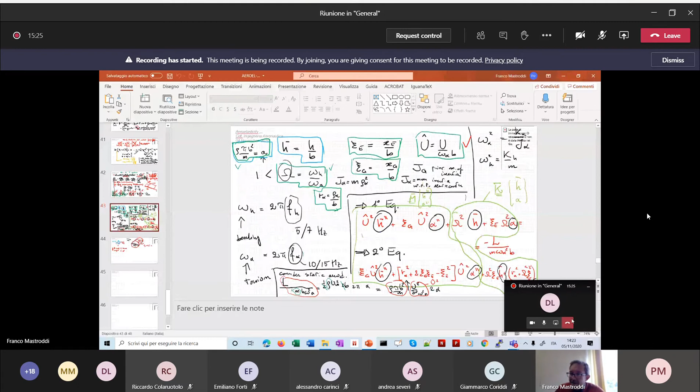Okay, I am very sorry, but I am going crazy in this period with this COVID emergency, and here I am for my favorite job, which is teaching. Okay, so here we are. Can you hear me? Yes. Okay, thank you, guys.

So we have the following undimensional numbers. We have this number here representing the ratio between what happens in bending with respect to what happens in torsion, in the natural frequency sense. So this is not properly the ratio between the first and second natural frequency of the system, but the ratio between the first natural frequency when the structural dynamics is decoupled and the second one when the structural dynamics is uncoupled.

And here we have the mass ratio, and this mass ratio has an easy interpretation: the mass of the solid structure with respect to the mass of the fluid in these cylinders. Okay. And at the end, we have obtained these two equations of motion. The first undimensional equation of motion is this here, with this undimensional term, this, and this.

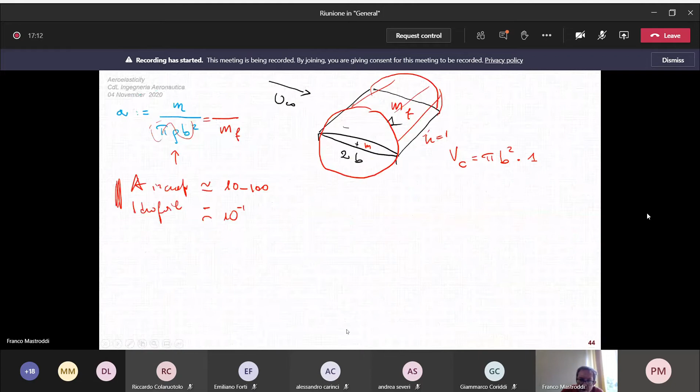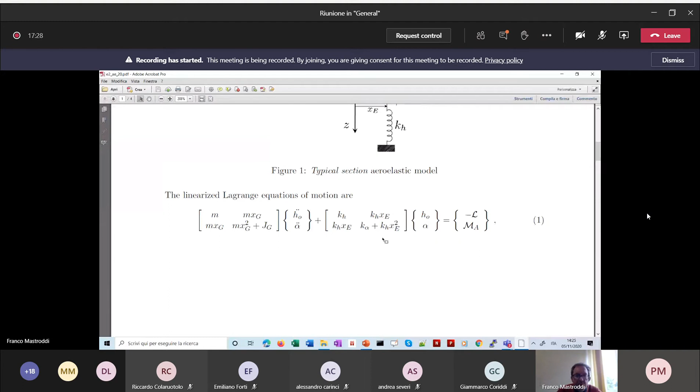And at the end of this undimensionalizing process, we have our final equations, which are these here. Can you see this? Yes. We started from the original dimensional system to this undimensional system, and we have our mass matrix, our stiffness matrix, and the load undimensionalized through these two groups. In the denominator we divided by a force per unit length, and here by a moment per unit length.

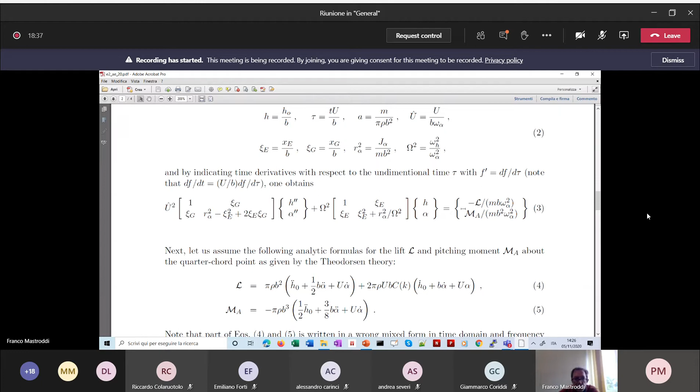In the left-hand side, if you do not consider the right-hand side term, you have the free response of your system, and you can study this free response by solving the natural frequency problem. So you should take the determinant of these two mass and stiffness matrices. In particular, we could do the following. Give me a second. We can take this equation. Okay, here.

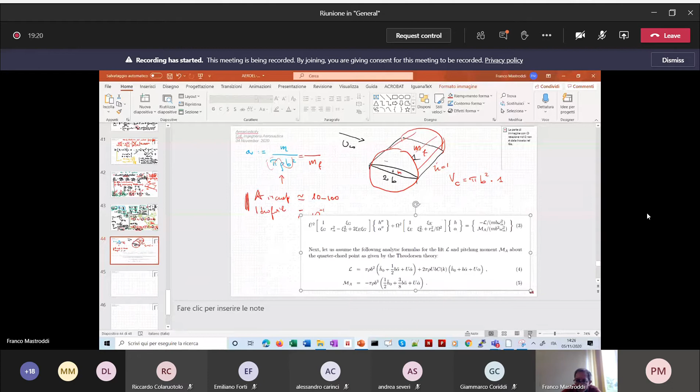And here we have this equation, and if you consider this part here, you have the undimensionalized mass matrix applied to the state variables, derived two times with respect to undimensional time, plus a stiffness matrix applied to h and alpha. And in the free response analysis, you don't have this forcing term, you have 0.

Therefore, if you perform on this system a modal analysis, in the sense that you consider the problem determinant of K minus omega squared M equal to 0, you obtain two omega values, omega 1 equal to a number and omega 2 equal to a number, which are in general different from omega h and omega alpha, but they are probably related.

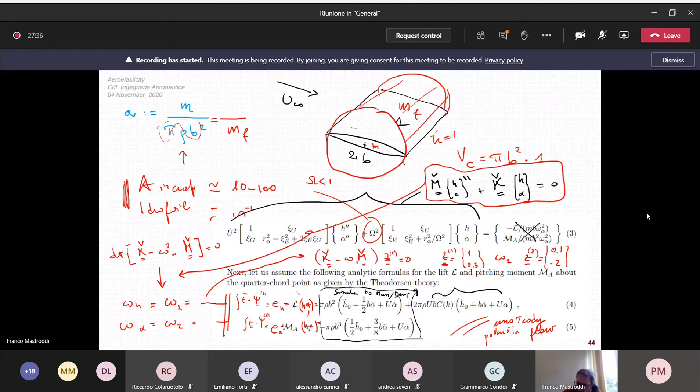And this is more complicated because we have, again, the pitch angle, the derivative of the pitch, the derivative of the plunge, but we have a very strange special function. The special function here is a famous function also known as Theodorsen function. This is a guy who lived in the thirties, okay?

Do you know the Glauert theory? Do you know this name, Glauert? Yes or no? Yes. Okay, so you know the Glauert theory, which is the two-dimensional theory for the airfoil, but steady case. So the Theodorsen function is just the extension of Glauert theory for the unsteady case.

Okay, and this is the formula for lift and moment within the Theodorsen theory, giving you time by time the lift and the moment as given by taking the derivative of this quantity. But we have also this quantity here. And if you take a book of aeroelasticity and look for this formula as Theodorsen lift function, you find this, but this is essentially wrong. This is wrong. Why is it wrong?

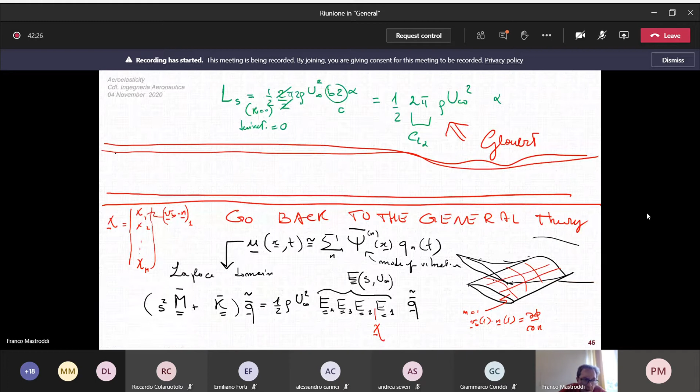Let me write here the note: already done. What have we already done? Linearized potential flow. And as a direct fruit of this linearization of the incompressible potential flow, we have defined an E2 matrix which is capable to transform the chi tilde vector, this unsteady boundary condition evaluated for each panel, and through the definition of potential flow we have the value of the potential in the same panel.

This is a vector. Whenever you apply E1 to the Q modal vector, you have chi. When you apply E2 on chi, you have the velocity potential vector. When you apply E3 on phi, what do you have? The E3 operator is another operator able to transform our potential flow into CP, the pressure coefficient vector. The pressure coefficient vector is similar to the chi vector, a vector defined on the body, giving the pressure coefficient value in panel 1, in panel 2, and so on.

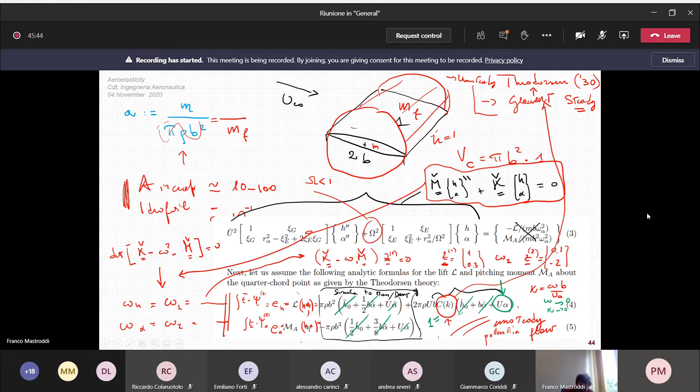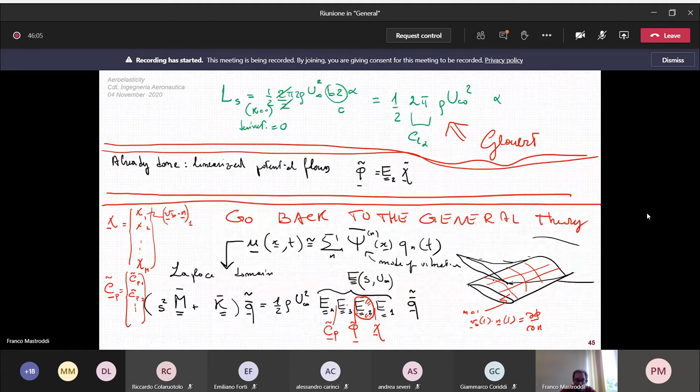Okay, so this is our next scope. In particular, within the framework of this general theory, I now want to focus on the matrix E3. So: evaluation of the matrix transfer function operator E3 as a function of S and as a function of U infinity. E3 by definition is the operator able to transform the velocity potential into the pressure coefficient vector in the Laplace domain.

So the theory behind this matrix representation is the Bernoulli equation, of course. In the Bernoulli equation, we found that the time derivative of phi plus 1/2 the square of the amplitude of the gradient of phi, which is the velocity, plus pressure over rho is a function of time only. It's not a function of space. This is the Bernoulli theorem. And in particular, you can evaluate this quantity in the undisturbed flow, so at infinity here.

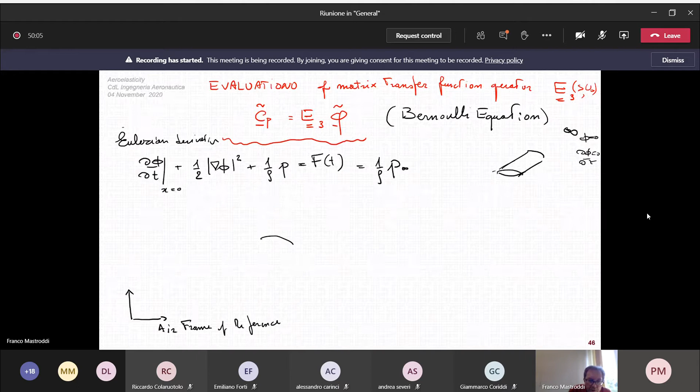And here you have your aircraft flying, and you have eventually a body frame of reference. This body frame of reference is actually sharing the x direction of the absolute air frame of reference, and this is typically z, and this is typically y in aeroelasticity, but this is a y in body frame of reference. This is an x in body frame of reference, and z.

And typically this flying reference system is moving with a constant velocity, which is equal to the aircraft velocity, of course. So here you have a velocity like this. This is flying. So how can I represent this air frame of reference derivative as a function of the body frame of reference derivative?

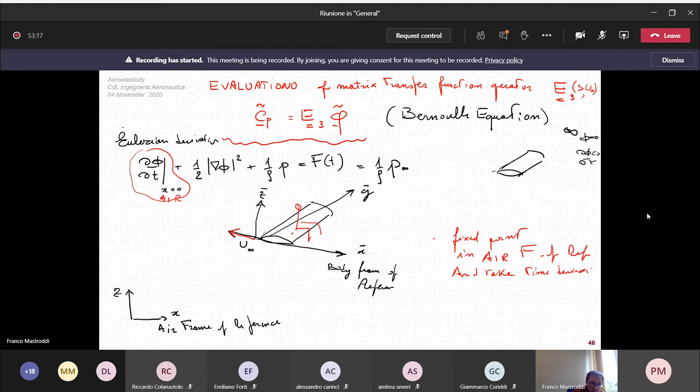And for example, here we are talking about the velocity potential. So fix this point and see what happens to the velocity potential as a function of time, keeping this point fixed. When you are here, this is me sitting on the aircraft, okay, and this is my new body frame of reference. When I take a time derivative in my body frame of reference, I consider a point in my body frame of reference, okay?

But now I am obliged to represent this physical concept. How can I describe this derivative in my frame of reference? Well, if you are like me here sitting on this wing, you see this point going in this direction, far and far, moving with respect to me with the velocity u infinite, right? So from my side, you see this point going farther and farther in time, and this point is moving with the velocity equal to u infinite.

So if you want to perform this derivative, you have to follow this point with respect to u. So this time derivative is, in my view, equal to the time derivative of phi with respect to time, but at x body frame of reference fixed, plus a convective term equal to the velocity of this point with respect to me, which is i vector u infinite dot the gradient of phi. Okay.

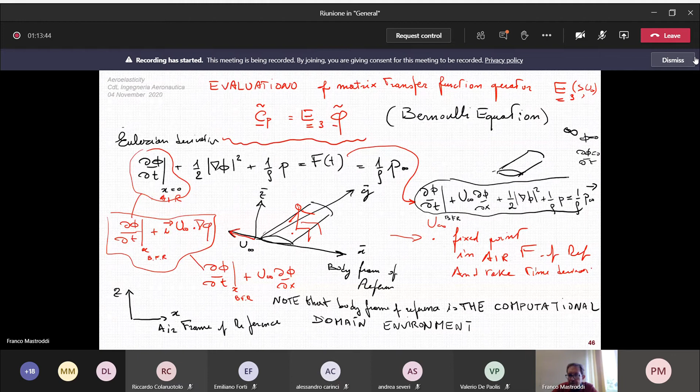So we can go ahead here and we can represent this like phi dot plus U infinite. This dot is a time derivative in body frame of reference, plus phi x. This phi x is representing d phi on dx, plus this term, gradient of phi, the amplitude to the power 2, plus pressure, and the pressure at infinite divided by rho. I don't know what happens.

Okay, divided by rho. Now, if we want to linearize our Bernoulli theorem in this condition, we have just to discard this term. So we are considering a linearization. And after this linearization, we can define our CP coefficient like the jump of the pressure minus P infinite divided by the dynamic pressure, a reference pressure, which is 1/2 rho U infinite to the power 2.

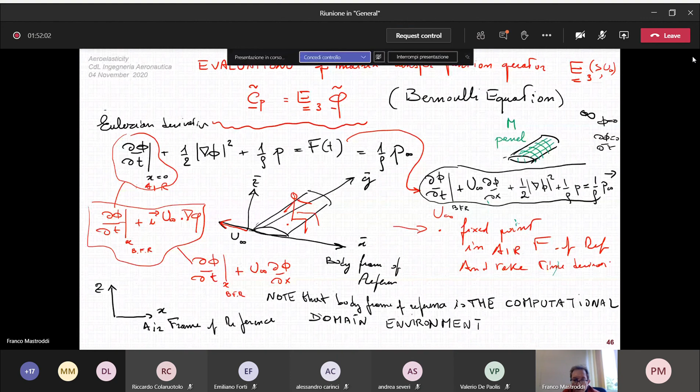And therefore, at the moment, we have actually defined three, excuse me, of the four operators. We have defined E4, we have defined E3, and we have defined E2. E4 is not depending on s, whereas E3 is depending on s in this way.

This is P, which is equal to SB by U infinite, and E2 is also depending on S through the delay mechanism related to the wake convection. We have only to define the last operator, transforming our modal coordinate into the normal wash in each body panel.

And after this definition, we have a clear and complete description of our unsteady aerodynamic matrix, giving us the generalized force as depending on the motion.